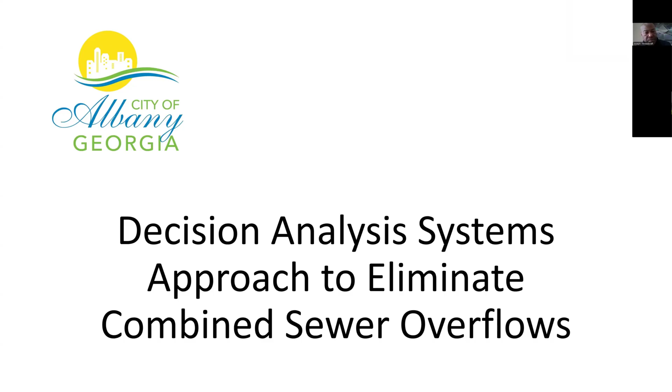As background, I earned my PhD from Indiana State University in construction management. I earned my master's in civil engineering from Norwich University with an emphasis in water resources. I also have an MBA. I'm a former naval officer with 35 years of relevant national and international experience.

For reference, I was selected by the Alabama State Port Authority to travel to Cuba to assess all of the country's major port and rail infrastructure. This was in advance of the completion of the Panama Canal widening, and that information was used to facilitate a public-private partnership that involved the Port Authority and a private sector business.

This body of work was done in Albany, Georgia. Albany, Georgia is a city in the southwestern part of the state, and it has approximately 75,000 residents.

Unlike many remaining cities in the United States, Albany has a combined sewer system, and some of those sewers actually date back to the early 1900s. What was interesting to note is that even though those sewers date back to the 1900s, there were a selective group of engineers who were planning for the future. They actually stubbed out and ran laterals so that at some point when this process was taking place, it would really facilitate a more feasible separation project.

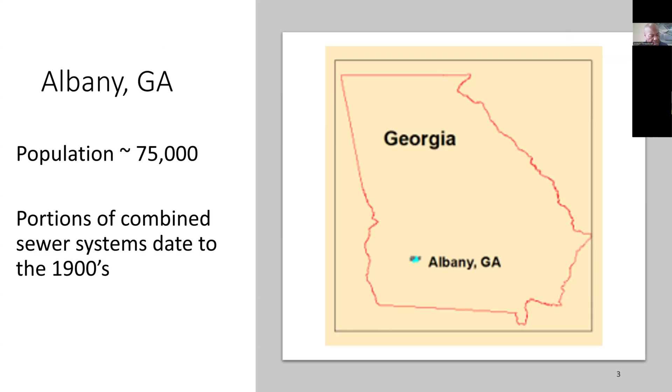In order to be successful, there was a requirement to have seamless visionary leadership. As you can imagine, projects of this cost magnitude have the potential to separate communities. Storm and sanitary sewers are underground; they're not something that's seen every day. So there's not necessarily an understanding among taxpayers as to why so much money should be allocated to something of this magnitude.

Information was developed and presented in a series of checks and balances, such that there was buy-in from the various community leaders. Ultimately, this 30-year capital improvement program had short-term as well as long-term goals.

When I talk about short-term, I'm referring to years 0 through 5, and then long-term would be years 5 through 30. The primary distinguishing criteria for that is that the two permits provided the city with a 5-year timeline to comply.

Some of the steps that were taken were first and foremost problem recognition. As indicated before, although these are unseen infrastructure components, they are viable components to a sustainable community.

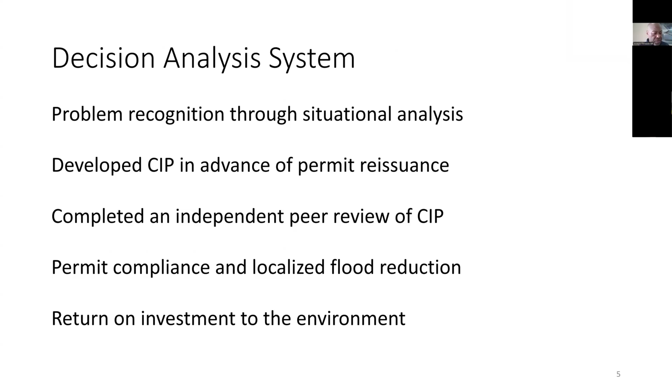As it relates to goals, there were two methodologies used after the permits were received. Initially, before the permits were written, the city had to begin an evaluation process so that they could ensure they met the 5-year criteria. In that initial evaluation process, they assumed that they would be required to separate 100% of all storm and sanitary sewers.

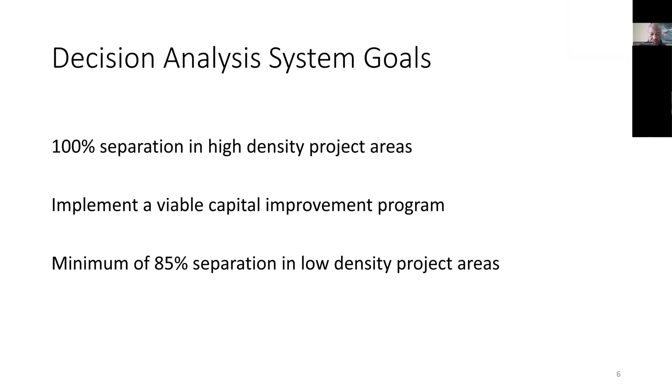For those of you who have an interest in understanding project costs, there is a diminishing point of return when you reach low density areas and you're trying to achieve 100% separation. So the permits were written from the state in that the average separation was only 85% requirement. Once they received the approved permits, the focus was achieve 100% separation in high density areas, and then focus on 85% separation in the low density project areas. They would use a 30-year CIP to make this a viable initiative.

In terms of the environment, these combined sewer overflows discharge into the Flint River, and the intended use of the Flint River is for fishing and water recreational purposes. Due to the current amount of untreated waste that discharges into the Flint, one will have to travel miles downstream in order to use the river for that purpose.

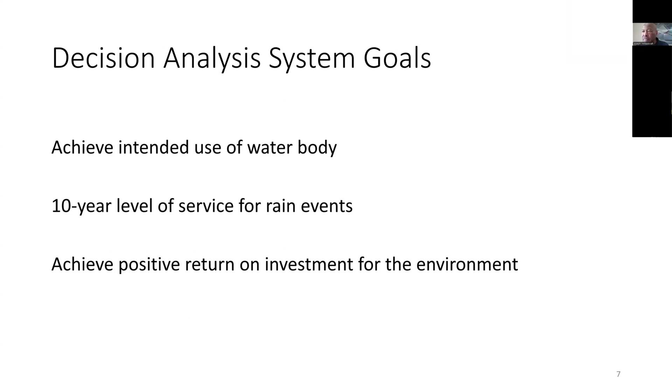Regulatory compliance. Agencies such as the Georgia Department of Natural Resources and Environmental Protection Division are currently managing water quality through the permitting process. Across the nation, the discharge of untreated combined sewer overflows negatively impacts receiving waters. So this is not unique to Albany.

As indicated earlier, Albany had 2 expiring permits. Georgia EPD reissued those permits with a 5-year requirement to comply. Within Albany, there are 8 discharge points, as well as a publicly owned treatment works, permitted separate from the 8 discharge points. Each of those 8 discharge points serves a drainage basin, collecting and transporting combined sewers throughout the city.

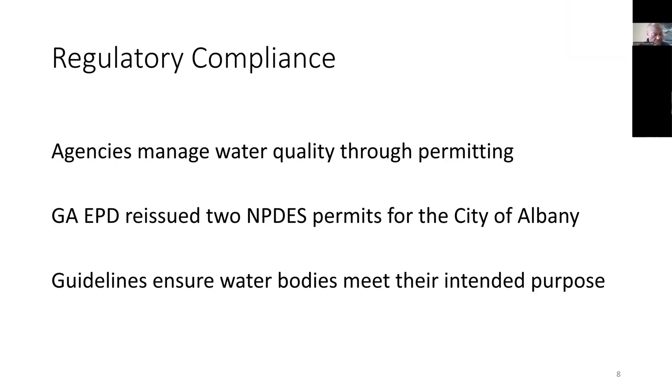To give you an overview, as most of you know, there are 2 ways to collect and transport sanitary and storm sewers. Historically, communities used the combined sewer approach. This was an economical way to develop and build cities, but the downside is that during high rain events, there was not enough capacity to carry the flow to the wastewater treatment plant, and so we end up with bypasses of untreated waste.

Beyond that, during heavy rain events, when the water or waste did arrive at the treatment plant, there was not capacity to treat all of it, so there was an additional overflow at the plant itself. Municipal separate storm sewer regulations normally apply to municipalities, requiring them to separate storm and sanitary sewers, but that method is more costly.

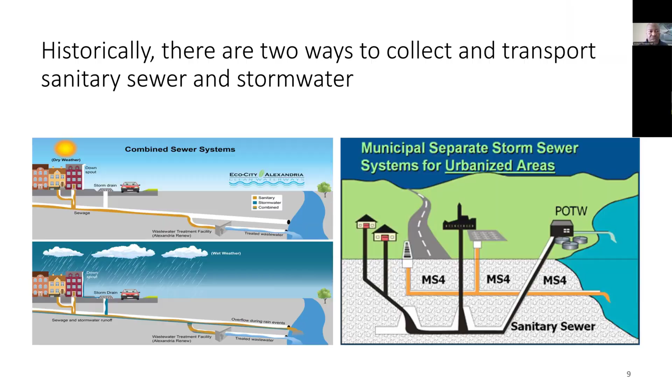The city of Albany retained an engineering firm called Constantine Engineering, later purchased by Adura, tasked with developing a 30-year capital improvement program to address the needs of the NPDES permits. Their work started in advance of receiving the approved permits. My firm was hired to conduct a peer review, and during that review we identified approximately $30 million in savings where the city of Albany did not have to expend those funds.

The modeling software platform they used to evaluate it was PCSWMM. In addition to doing a peer review, we were retained to complete a community development block grant through the mitigation program for Phase 1 and Phase 4 of the 8th Avenue Basin.

There were two separate constraints the city placed on us. When evaluating the model for compliance, we were told to assume that all calculations, assumptions, analysis, and model results were accurate. We were reviewing it simply for compliance and conformity, and even with that limitation, we still identified 10% savings.

After that, when we were awarded the contract for 8th Avenue Phase 1 and Phase 4, they wanted an engineering seal confirming that 100% separation had been achieved. As with all engineers, we are always cautious when such a constraint is placed on us.

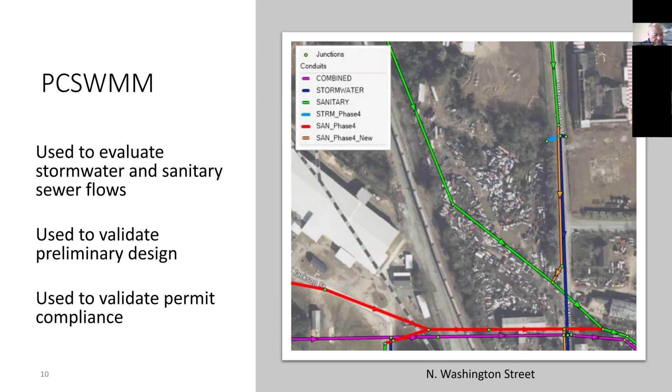The Adura final report was developed to establish a comprehensive overview and an ultimate solution to the City of Albany's problem and requirement to comply. As indicated previously, instead of achieving 100% separation basin-wide, they will achieve 100% separation for high-density areas, and 85% separation for low-density areas.

There's a need to update aging equipment, and these are just two examples. Rotary drum thickeners are used to remove excess moisture from the sludge, reducing hauling costs and making it more efficient when they get to the land application phase. New thickeners reduce hauling costs. Also, new clarifiers will increase the efficiency with additional removal of solids.

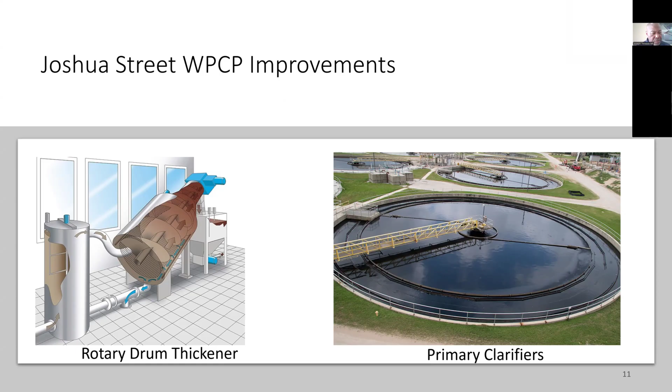Lift station upgrades: the city has a number of lift stations. Some use simplex pumps, but for the most part you want redundancy, so they installed duplex pumps. They evaluated and reevaluated flows because additional development had taken place since initial construction, so some pumps were under capacity. By taking these approaches, they were able to greatly reduce overflows due to malfunction or undersized equipment.

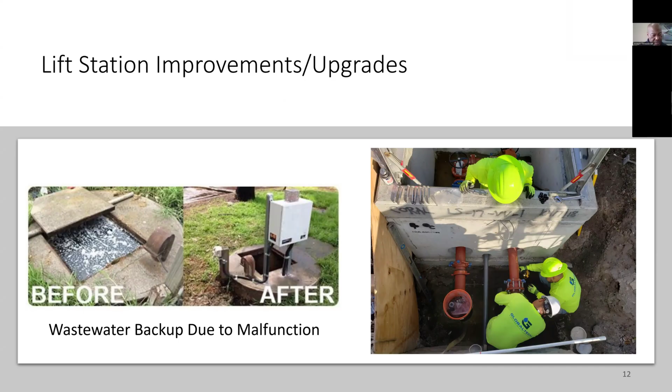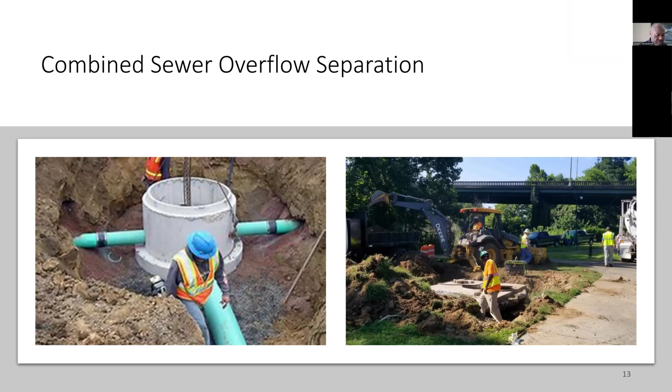In regards to construction in municipal areas, this is just off the Broad Avenue bridge. There are areas where it seems like an urban environment, but also areas where the sewer runs along streams and creeks in floodplains and floodways that are not heavily populated. This gives a perspective of the different construction areas.

Inflow and infiltration. We recognize that water unfortunately enters the system at various points. At these points of connection, whether you have a damaged manhole or a cracked or broken pipe, there's opportunity for inflow and infiltration, and that needed to be reduced. One way to reduce it is using methodologies such as Insituform, and we'll look at some additional alternatives as we move forward.

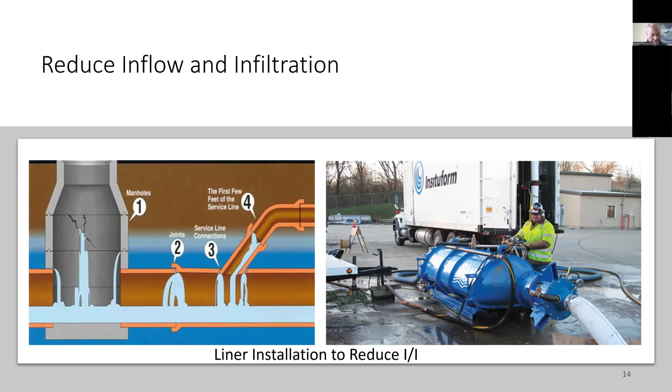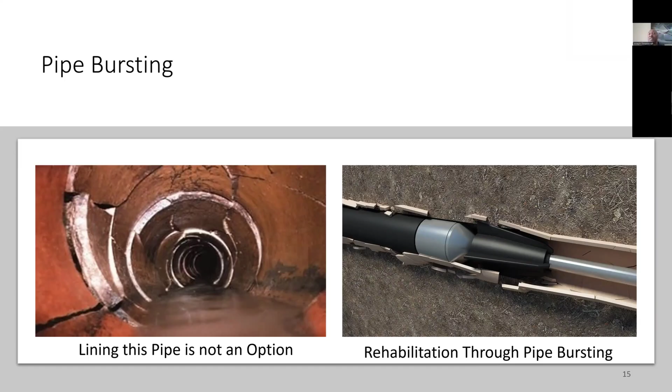Pipe bursting. One thing that stands out in this slide is that you can do pipe bursting, point repair, or install entirely new lines. The line on the left, lining is not an option - it needed to be replaced. If there's not a need for substantial upsizing, pipe bursting becomes a viable alternative. Looking at the coefficient of friction with high density polyethylene, you can achieve an increase in flow by slightly upsizing the pipe to accommodate whatever growth is taking place in that area.

Additional constraints occur in municipal construction. In this instance, there's not an opportunity to slope the sides, which increases the risk of the trench collapsing. So we want to be safe at all times - there's no encouragement to take shortcuts or save money on installation within a municipal area. Regardless of whether municipalities are required to comply with OSHA requirements or general safety concerns, our specifications were written as the minimum criteria. In this case, they have double trench boxes indicating this trench is approaching depths of 20 feet or more. Again, safety was always a priority.

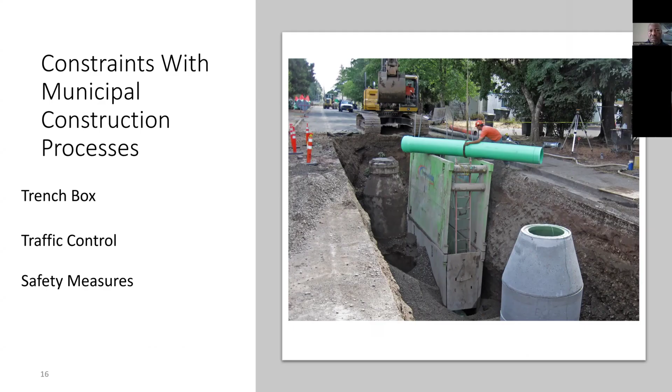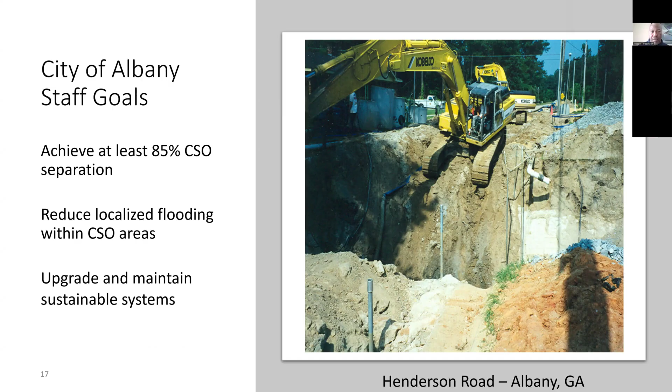Earlier we spoke about point repair. In the slide we saw then, point repair was not a viable option, so we recommended pipe bursting. In this instance, point repair is an option. This is an example where we cleaned and videoed the lines, identified particular breaks, and made recommendations for economical repairs. Throughout all of these processes, it was required to educate the decision makers so there were no surprises - they understood the scope, the schedule, and the budget.

As I'll speak to later in the presentation, this methodology needed to be consistent such that when elected officials changed seats, whether the board was led by Democrats or Republicans, a reasonable person would say yes, we need to fund the completion of this initiative. We value return on investment to the environment, and we want to ensure we comply with permit requirements.

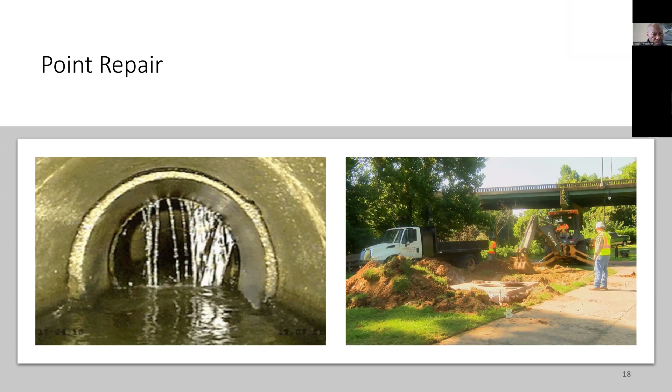TEI notes that the best opportunity to implement cost-effective measures is at the beginning of the project, during the planning and design phase. We've noted that city staff have completed relevant changes throughout the last 50 years. There's been a concerted effort for the city to make incremental improvements. They were always working towards separating storm and sanitary sewer, but there was never an impetus, such as a consent decree, to really push them to have a funding mechanism to address these needs.

We made recommendations to explore collaborative cost-saving approaches, because sewer separation is really the most expensive method of eliminating a combined sewer. It's not the only method, but it is the most expensive one.

We evaluated the report based on the Environmental Protection Agency's 9 minimum controls for the correction of combined sewer overflows, and I'll just read through those briefly: proper operation and regular maintenance programs, maximization of storage in the collection system, review and modification of pre-treatment requirements, maximization of flow to the publicly owned treatment works, elimination of combined sewer overflows during dry weather, and control of solid and floatable materials in combined sewer overflow systems.

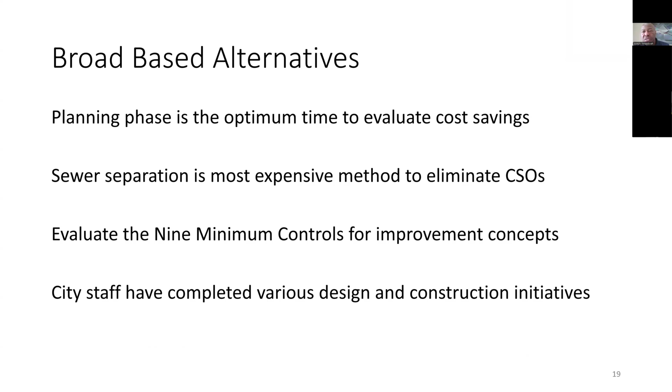In inline retention, this approach will maximize storage by adjusting overflow structures so that the city could take advantage of system capacity. Oftentimes you'll hear conversations about weirs, and initially young engineers may not understand what the ultimate goal is, but the purpose of the weir is really to slow the flow and take advantage of the storage capacity. That's one of the purposes, rather.

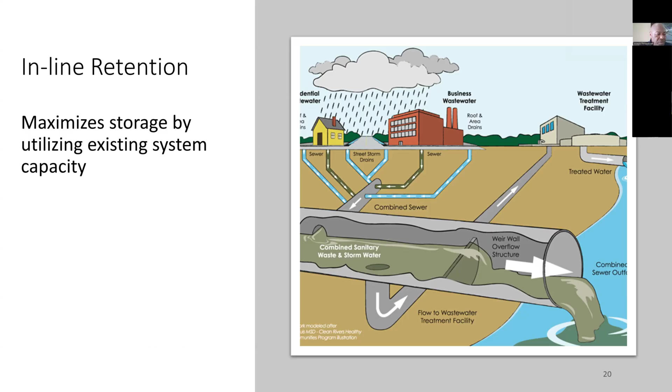Offline retention. A tunnel is an example of offline retention. These devices provide additional system capacity that can be used to reduce combined sewer overflows.

This particular photograph was taken inside the City of Atlanta's South River Tunnel project. This was a $110 million project that was part of the city's response to its consent decree. This tunnel that I'm standing in was over 9,000 feet long, 14 feet in diameter, and connected to a 45 MGD pump station. That's a lot of waste.

This work was accomplished via the Atlanta Services Group, a joint venture between SL King, EDT, and Jacobs. In addition to the city of Atlanta, other municipalities have offline retention, such as Elizabeth, New Jersey, Grand Rapids, Michigan, and San Francisco, California.

So when we were communicating with elected officials in Albany, Georgia, we were able to show them direct and relevant instances of how other localities manage their processes. Once they were educated on what technology existed, they could feel more comfortable making informed decisions related to their area of responsibility.

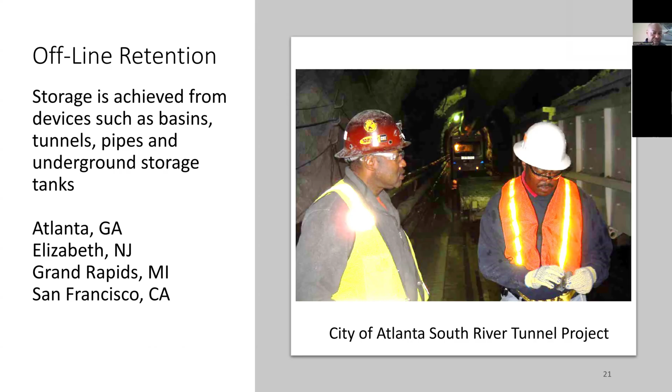Green stormwater infrastructure. This is a resilient approach to stormwater management, and it's the Fourth Ward Park in the city of Atlanta. This park is actually designed to flood. It can be used for recreational purposes during low water events, but in high water events it floods, and once the flood subsides, it's cleaned and returned to use as a park.

Prior to taking this initiative, this area of the community was blighted. It was unmaintained, not usable, but this was a win-win situation for the community as well as for the city of Atlanta.

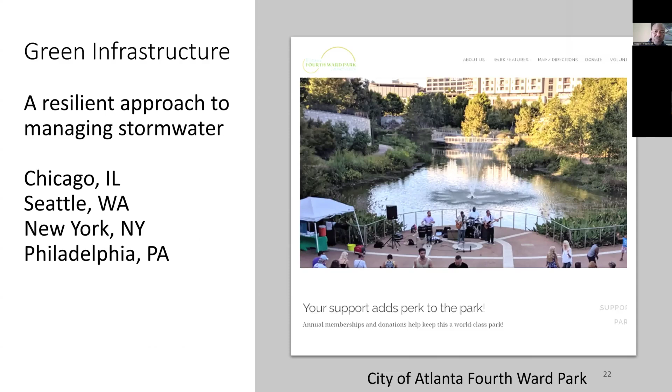This is a local example in Albany, Georgia, of green infrastructure utilization. Ritchey Marbury is my mentor, and Ritchey designed this such that the practice field floods and forms as a detention basin. It's not evident in the photo, but along the left that's actually a constructed berm, and farther to the left of that berm is the Flint River.

This is the lower campus of Albany State University. During the floods of '94 and '98, this campus received substantial flood damage.

If you recognize that part of an engineer's responsibility in designing projects is also to mitigate future losses - in this instance, one of the things FEMA approved in terms of mitigation was the expansion of the Albany State campus across the street, further from the Flint River and on high ground, such that those investments of taxpayers' dollars were not subject to continued and repeat flooding.

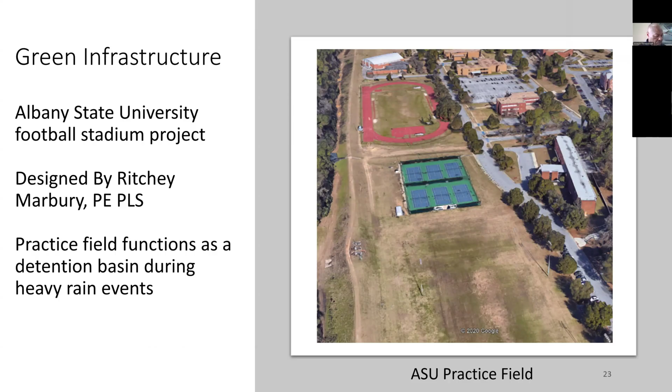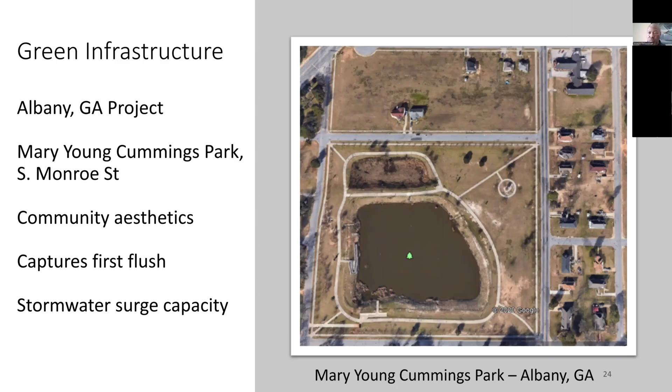Another method of green stormwater infrastructure is property acquisition. Along the Flint River, three entities—the City of Albany, Dougherty County, and the Southwest Georgia Regional Commission—acquired properties, removed the structures, and left that space as green space.

The permitting requirements in place in Albany many years ago did not recognize the floodplain or the floodway. So construction was allowed to take place, with no requirement to have a finished floor elevation at least 1 foot above the 100-year base flood elevation.

Within this community, after the floods of '94 and '98, there was a lot of conflict because people wanted to rebuild their homes, but they could not rebuild the way things were. They had to meet the new building code, which required base flood elevation plus 1 foot.

Even that elevation would not guarantee there would not be future flood damage, because our seasonal events are becoming more violent—there's more rainfall, more intense and more frequent events. So it's forcing municipalities, not just Albany but across the country, to revisit the way they permit structures for residents.

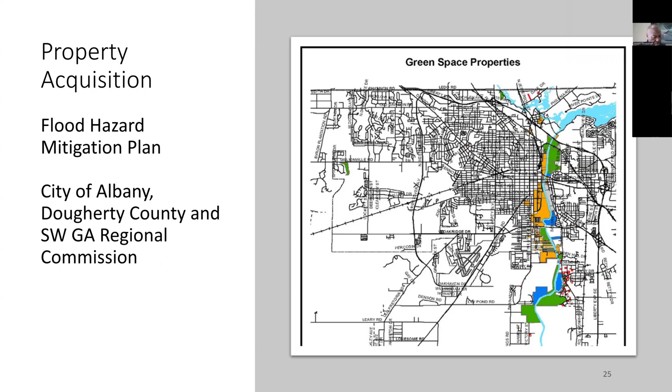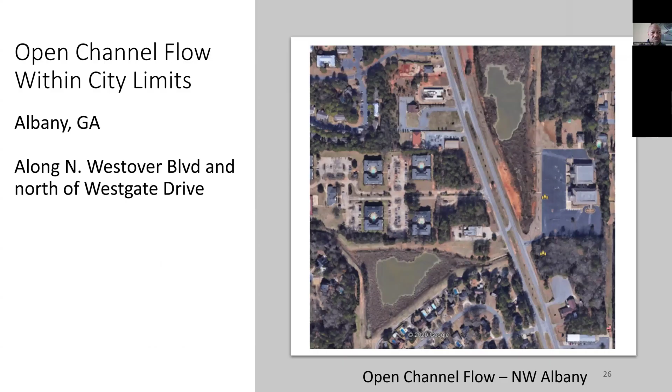That really concludes the basis of my report. I'd like to remind you that the two active NPDES permits had a 5-year compliance criteria, so June 2025 was the deadline for compliance.

The city has received approval for a compliance extension. They're actively operating on an approved extension, but have full intent to fully comply with both permits that were issued to them.